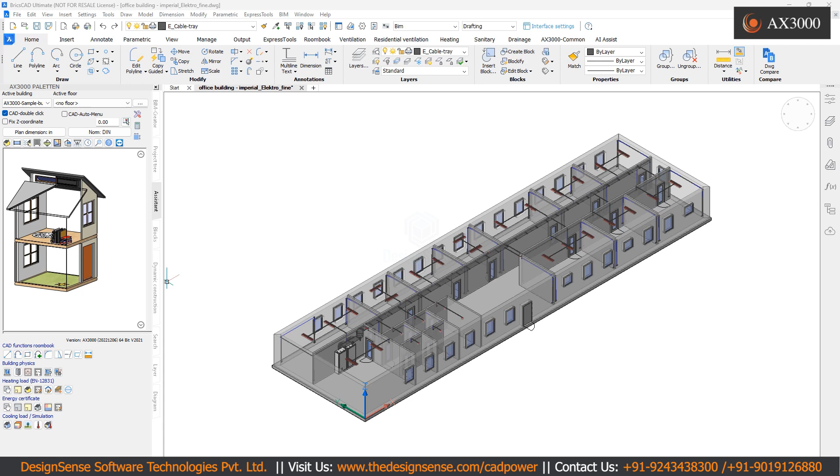This video will explain the functionality of the AX3000 Electro module based on BricsCAD. First of all, let's start with the utility room. Here we have decided to place an enclosure on the northern wall. Therefore, I select the element from the database. It was inserted into the database using a 3D model. To have a second one, we are mirroring it to the right side.

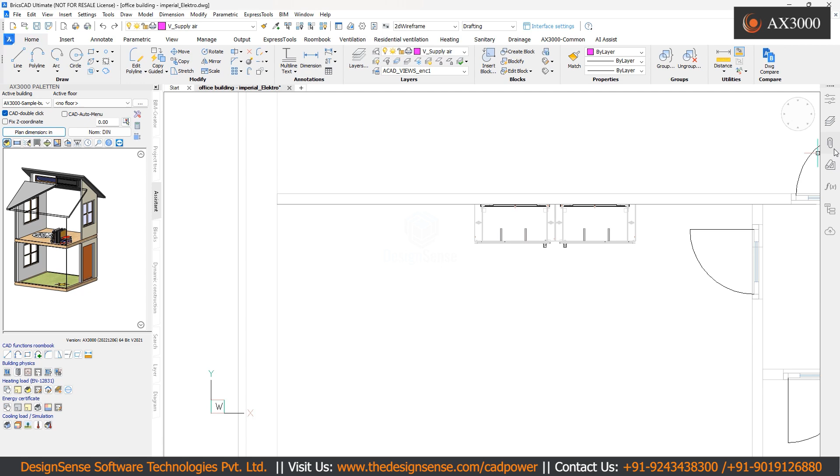Afterwards, we work with external references to switch on other trades or other disciplines for coordination. We now know the position of our first cable tray. We select 2 points in the plan view, select the size, elevate it to the correct height, and change the length to 3000 millimeters.

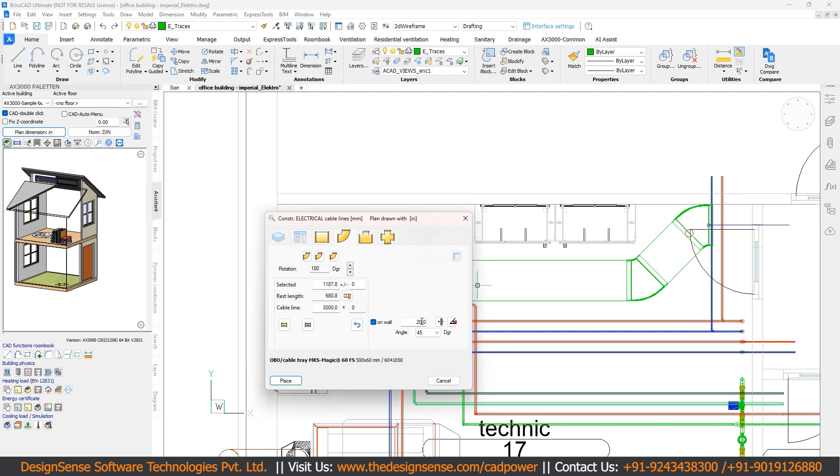Now we have decided to change the path to the wall, so we define the first elbow. It should be 45 degrees, and afterwards the second one, a distance of 20 millimeters to the wall. And now we want to connect the enclosures to the cable tray, so we use extension T pieces because of their easier usage.

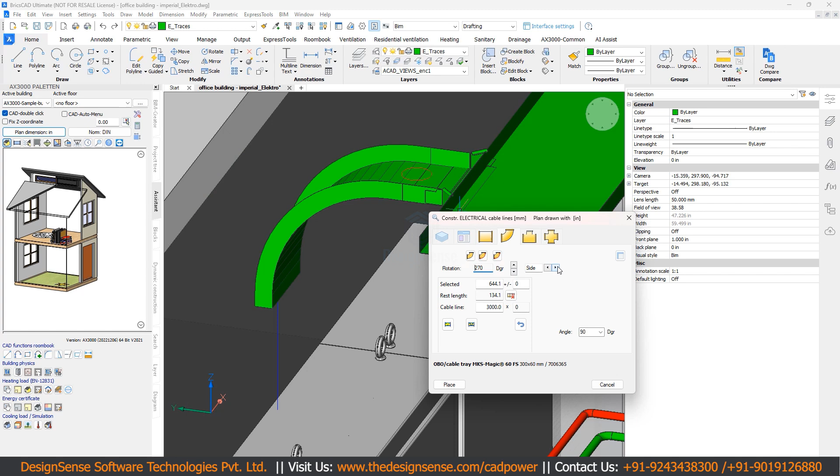After inserting the extension T, we enlarge the cable tray to the wall, use an elbow going down in front of the wall to connect the first enclosure. For the second enclosure, we quite simply copy this construction. As the next step, we want to use fixtures to mount the cable trays to the ceiling. 3 for the first duct and 1 at this position.

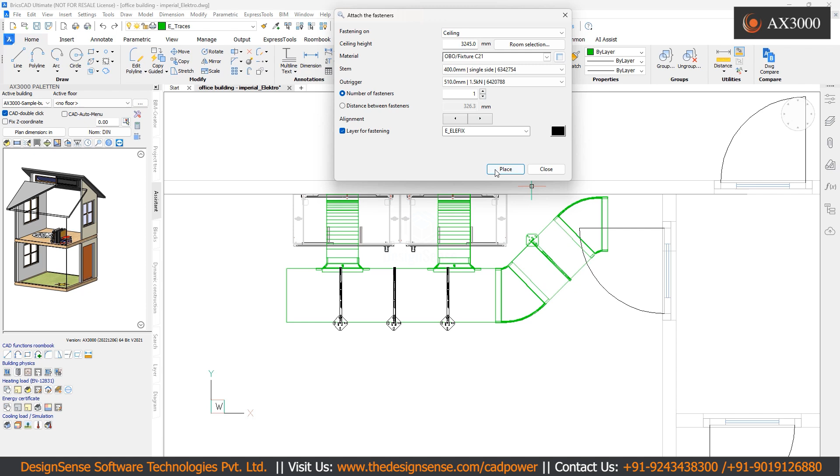To finish this step, we continue at the end of the elbow, go forward with the same cable tray size, and finish the last part of the system with a smaller one. It should be straight on the left side. We also add fixtures here to mount the cable trays to the ceiling to finish it.

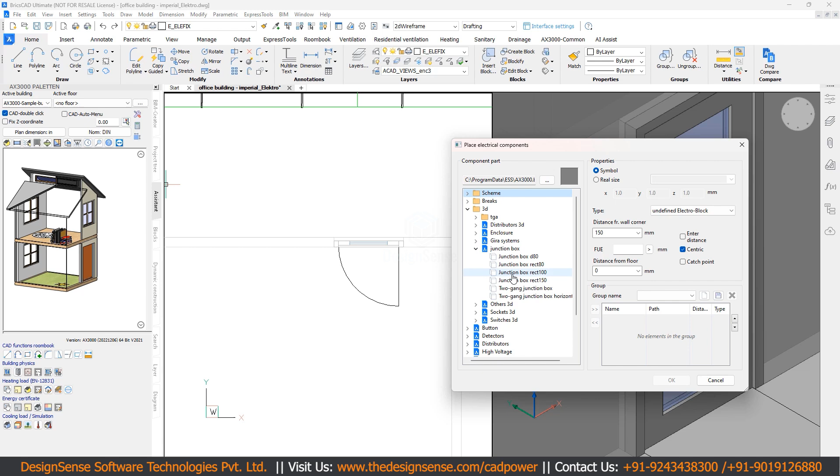Inside the rooms, we want to model the conduits, the elements, and the junction boxes. So let's start with a double junction box close to the wall. It should be a vertical one, and all the others can be placed in the same way. So we add a few 80 mm round junction boxes. For modeling the conduits, we use 3D polylines to connect these junction boxes.

Also, the lamps are placed inside the room onto the ceiling. To finish this step, we use a function to extrude the conduits along the lines. Now we have 3D elements and our model is finished. This can be done for all other rooms.